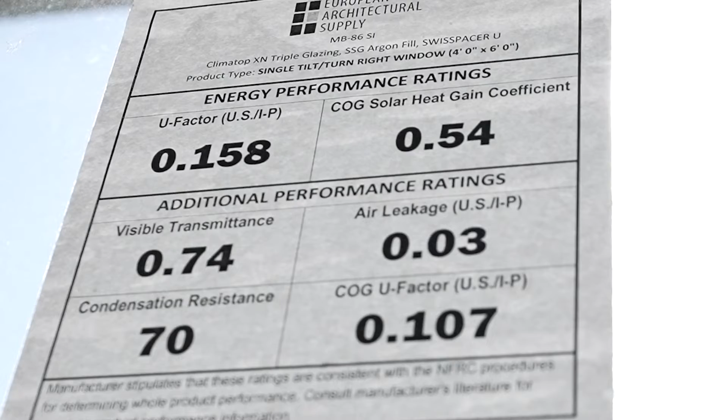So we'll start with the window I just talked about, this tilt turn. All these windows have a label, and the label tells us a number of things. We have COG U factor, which is center of glass, 0.107. So what that's telling me is that somewhere in the center of the glass, we're basically at R10, if you understand R values. The way you get there is you take 1 and divide it by the 0.107, and that gets you to that R10. It's basically the reciprocal of the U value.

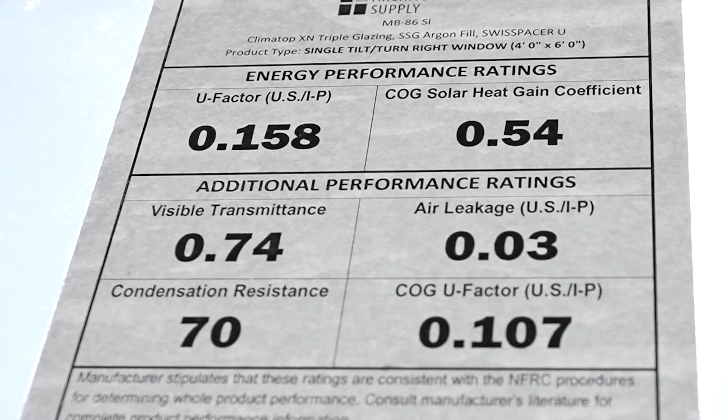The U factor of the window in its whole, with the frame and the glass, is at 0.158. You can see that's significantly less. If I take the reciprocal of that, 0.158 gets me to probably about R6.3. So it's significantly lower than the center of glass number.

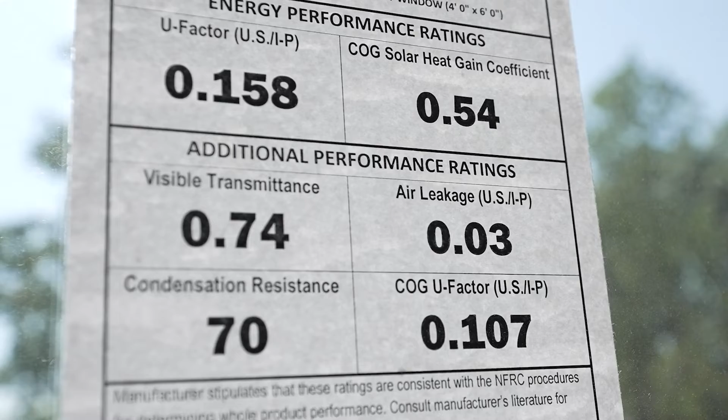So what generates that delta? Well, the center of glass is basically just measuring the R value of the center of the glass of the IGU, which is insulating glazing unit. The other number, 0.158, takes into account the frames—in this case the sash, or the frame of the operable piece, but also the frame that makes up the window frame that receives the sash. So we have a lot of aluminum there, and even though it's thermally broken, it's not as good an insulator as the center of the glass. We mix that with the frame, which is much poorer, and we get the window U factor, 0.158 again, R6.3 for that window.

Now, this window is 4 feet wide, 6 foot tall, and generates those numbers. Now we're going to go over to this window, which is 10 foot wide, 6 foot tall—basically 2.5 times the size of that window. Now you would think, wow, this big old window has to be super energy inefficient.

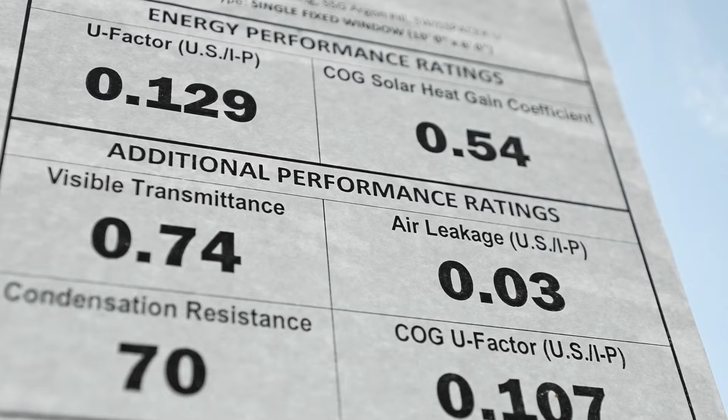Well, it's quite the contrary. Remember, as we just pointed out, the center of the glass is at R10. The frame on that other window was 6.3, but that was an operable frame, so we had twice the amount of basic material making up the frame. This is a fixed unit, so we have considerably less frame here. We have no air leakage in the system, and that generates a U factor for this window at 0.129, which translates to roughly R7.6. So we're a whole R1.5 above that first window, even though we're 2.5 sizes bigger, just because we moved from an operable window to a fixed window.

If we go to a third example, this is another tilt turn. The difference between this tilt turn and the first one is that one was 4 foot wide, 6 foot tall, which generated about 24 square feet of window. This one here is 3 foot wide by about 4.5 foot tall, so it's a little bit more than half of that window. But the majority of that half this one is shrunk is glass, and if you remember from the first example, glass had the higher R value than the frame.

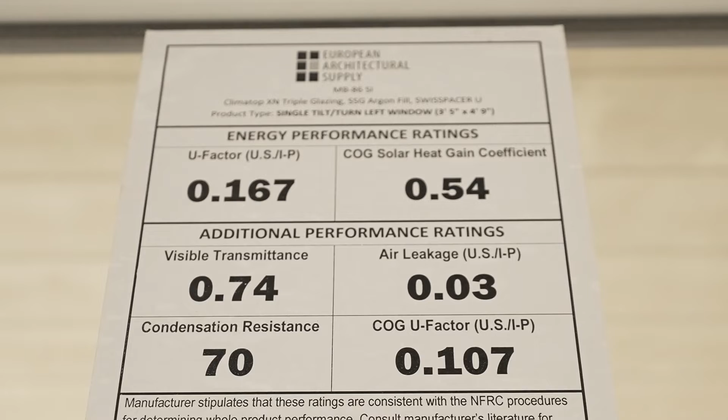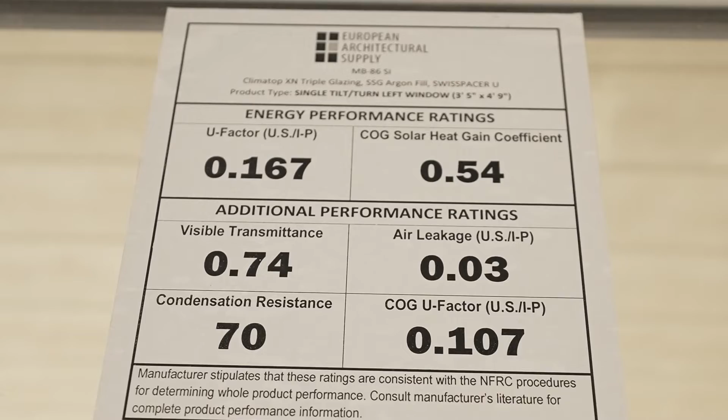So that first window, the glass ratio to frame is much higher than the glass ratio to frame here. Because this is less, we're at 0.167 here, even though we're still carrying the 0.107 for center of glass. What that does is take that number down to about R6. So it's only 0.3, 0.4 less than the other window—not a huge detriment to the decision.

And obviously this one had to be a different size because it's fitting over cabinets. The countertop's going into the window there, so we don't have any trim. So there's a bunch of design decisions that go beyond just performance. But I think it's really important that when you're designing a building, you understand what drives optimal performance versus where you end up losing performance.

Because I'm guessing if I took that window and made it half that size, 2 foot wide by say 2.5 feet tall, that 0.167 would probably go to like 0.183, and it would drop that number closer to R5.

So still not a bad window. To put it in perspective, a lot of domestic windows, the code requires about 0.3 for the U value, which translates into R3. So we're twice code here, twice code there, and 2+ code on the big 10-foot window. The other parting notion is regardless of how big or small the windows are, they're never as good as an insulated wall. The windows are always the worst part of the wall.

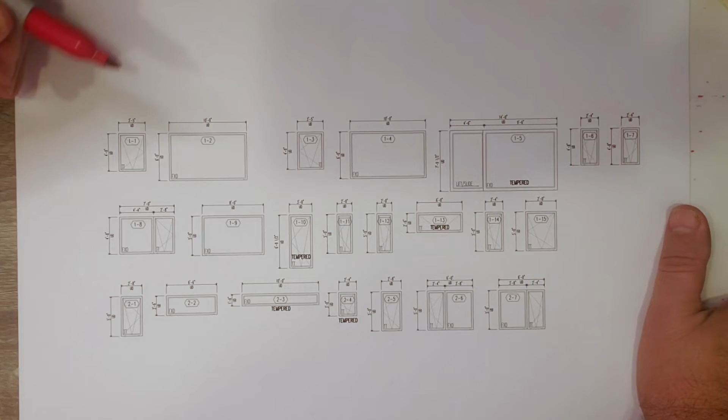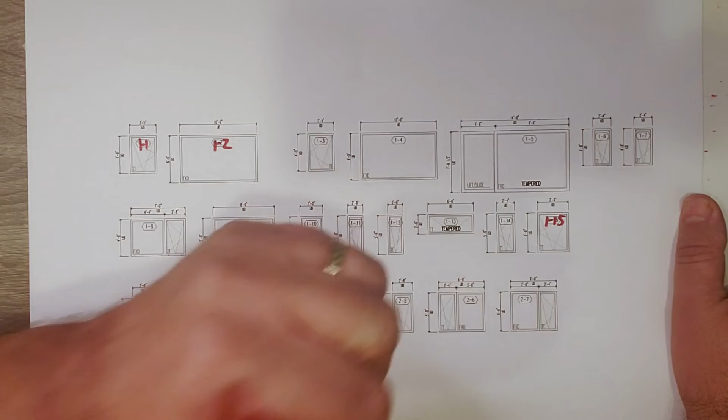So printed out here, these are the window elevations. They're drawn out and broken out of the set of drawings and out of the building elevations because this is the information that the window supplier uses to quote the window package. We talked about 3 different windows there: the first one was window 1-15, and you notice each window has an individual tag. We talked about 1-15, 1-1, and 1-2, and you see 3, 4, 5, 6. The second floor, they start out at 1. We had 15 windows on the first floor, 2-1, 2-2, 2-3, etc., up through 2-7, so 7 windows on the second floor.

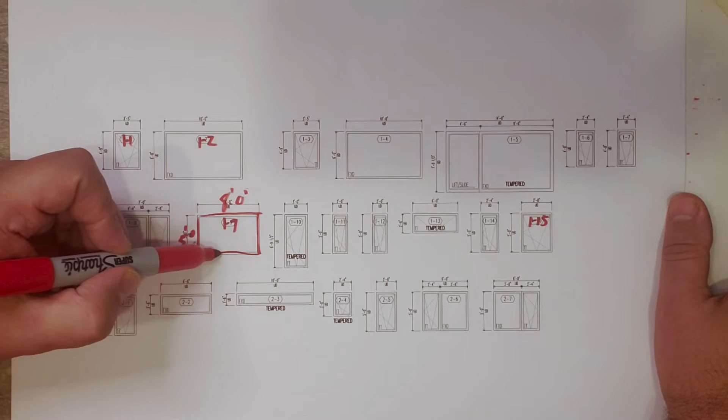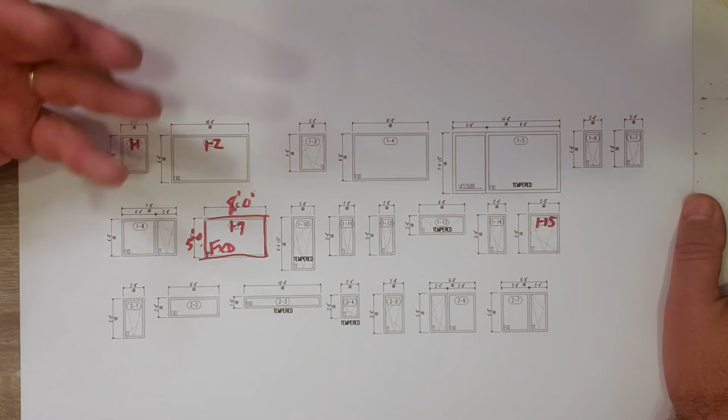A couple tidbits of information we put on here: we have the window tag, and we'll use window 1-9 as the example. You can see that is an 8-foot window - 8 foot by 5 foot, so 40 square foot window. We also label it as fixed, so they know they're quoting a fixed window. We know window 19 is 8 foot by 5 foot and is a fixed window. We also have other information universal to the whole package - they're Aluprof, they're aluminum, the color is anthracite gray, etc. But to the windows specifically, that's that information.

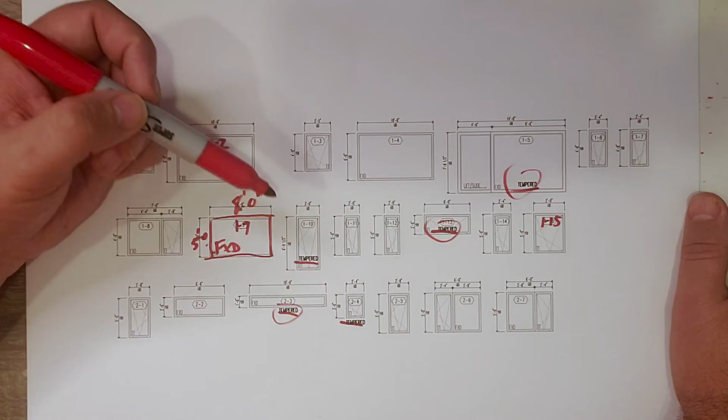You can see some of these windows are labeled as tempered, and they have to be tempered for different reasons, like it's a lift and slide door, or it's in a shower, or in a stairway, or some other hazardous location, bathroom, or it's too close to the floor. There's a number of reasons why windows get tempered, and that does add a little bit to the cost of the window.

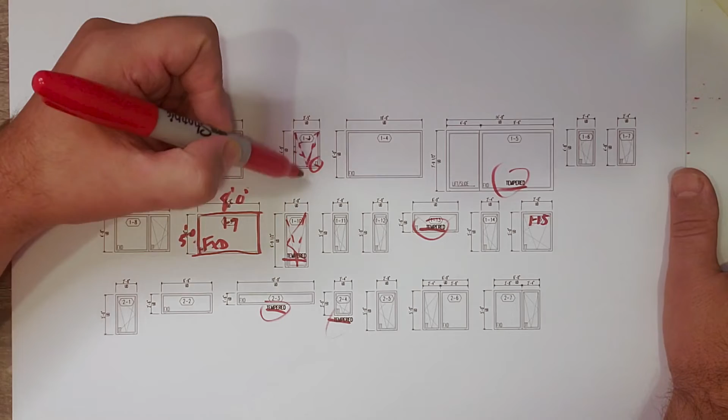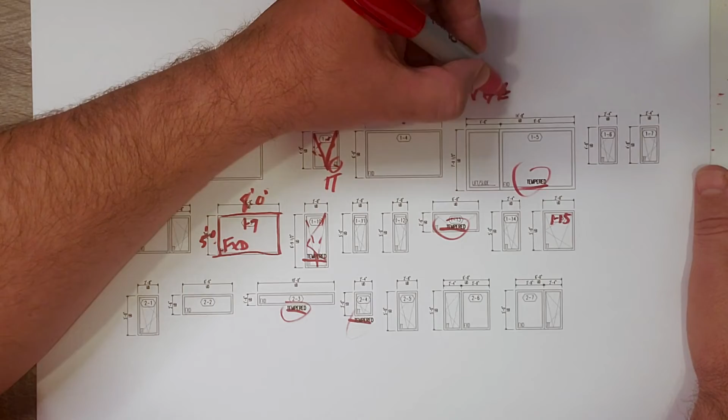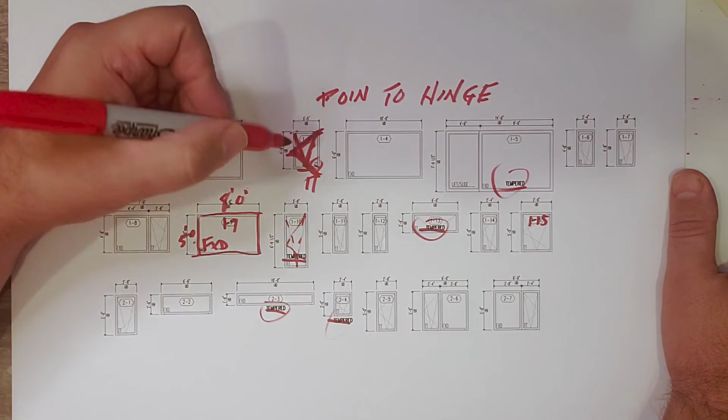You can see on some of these they have some funky arrows or dashed lines moving through them. Those are tilt turn windows, labeled TT, and what it's saying is these are the direction of operation. We have the one that goes down - the way I was always taught to remember is the arrows point to the hinge. That is the American standard. When this points down, that's the tilt version - the hinge is here, and this is the strike end, so the window falls in like a hopper. When it has the arrows going side to side, that's the turn option, with the hinge being here and the strike being on that side. These windows are always viewed from the exterior.

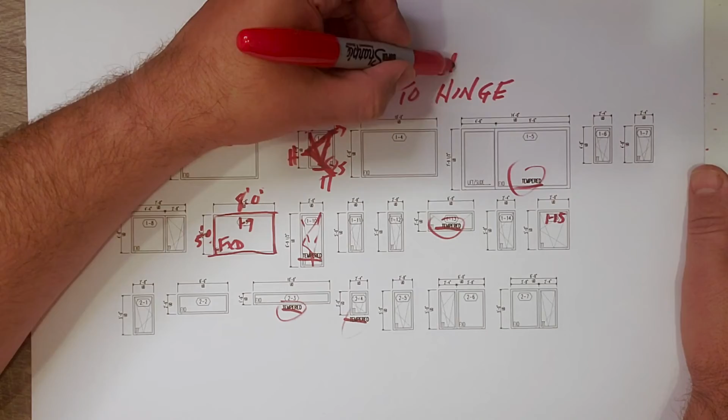So that window is swinging inward, and it's hinged on the left side, looking at it from the exterior.

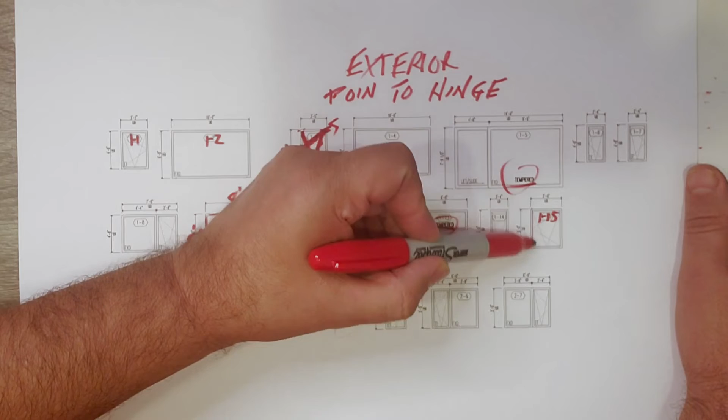Let's dive into the three windows we talked about specifically and reiterate those. So window 115, that's a 4 foot by 6 foot window. That one had a center of glass value of 0.107, and it had a U value of 0.158.

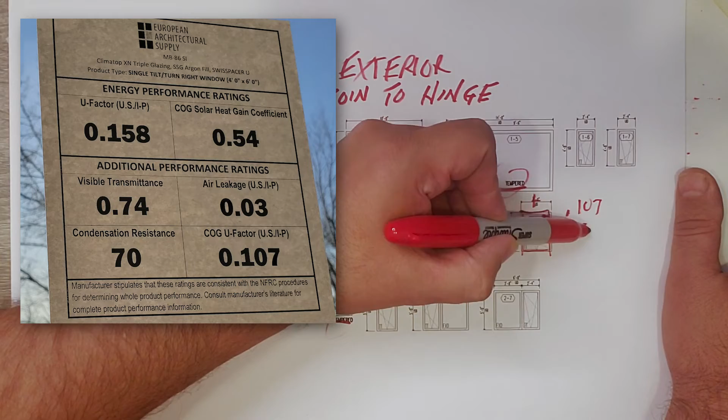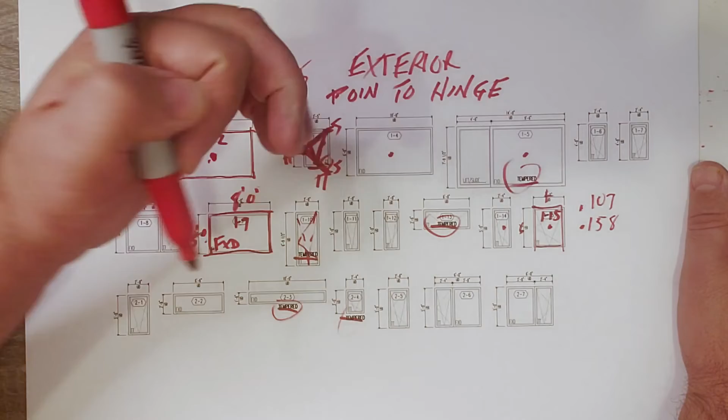Now, interestingly enough, when we go over to this window that is 10 foot by 6, which is 2.5 times window 115, it still has the 0.107 center of glass, because the glass technology is the same. So the U value at the center of glass is always going to be the same because the glass is made the same way. That doesn't change.

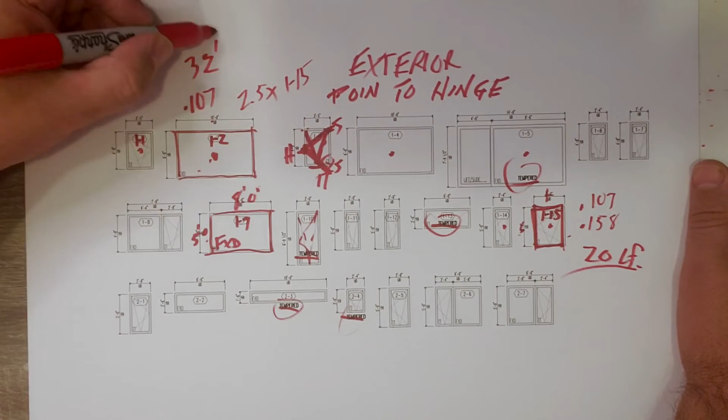But what does change is this: at 4 foot by 6 foot, that's 12 and 8, so that's 20 linear feet of frame. This is 32 linear feet of frame. But that 32 is not 2.5 times or 50 linear feet, which is what that window would be if it scaled proportionally.

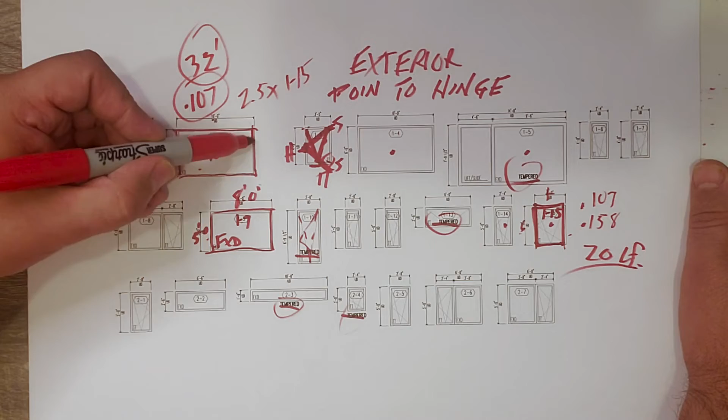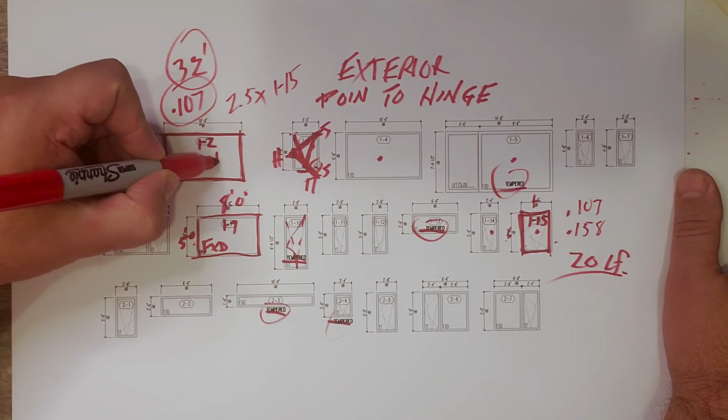So the efficiency comes from the fact that they both have the same center of glass, but because this does increase in size, but not proportionally to the size of the window, meaning we do have more frame, but it's not 2.5 times the frame, this window here yields 0.129. And proportionally, the last window we looked at was 1.1 by 1.1, again with a center of glass of 0.107.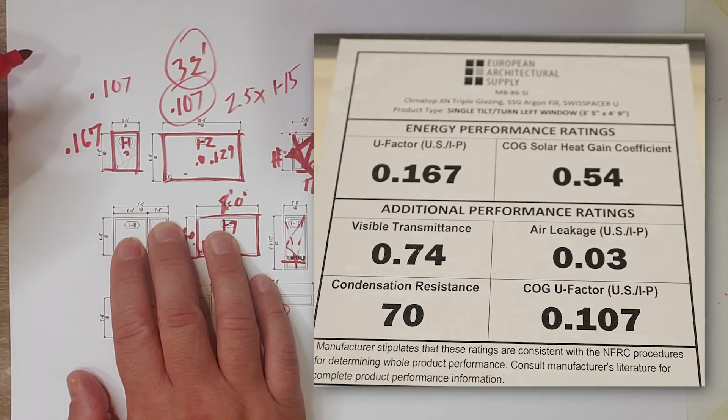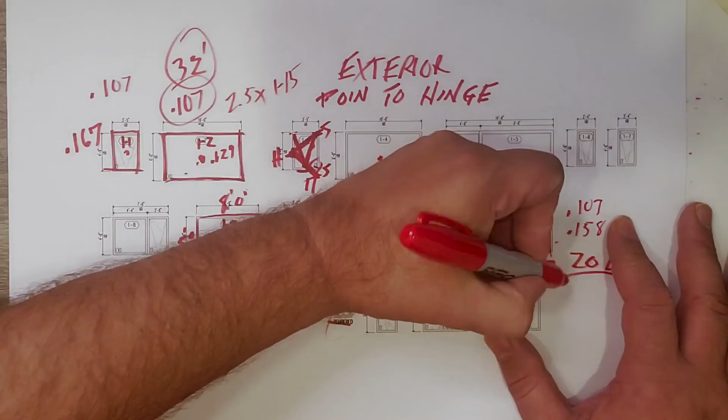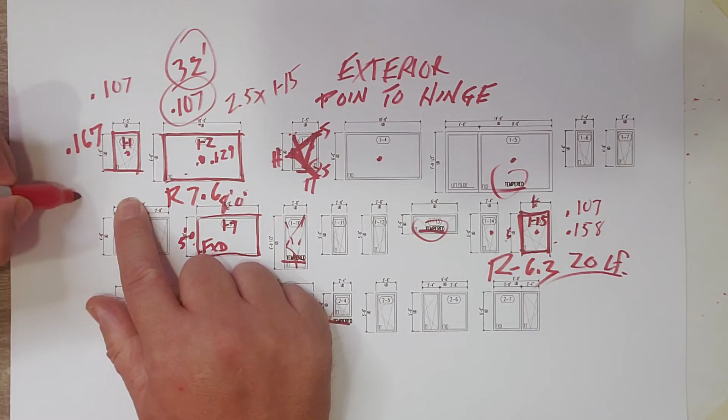But it had a U value of 0.167. Now I'm speaking in U values. If you want to translate that to R value, you simply divide 1 by the U value number. So the 0.158 window is R6.3. The larger window here is R7.6, and the last window here is right around R6.

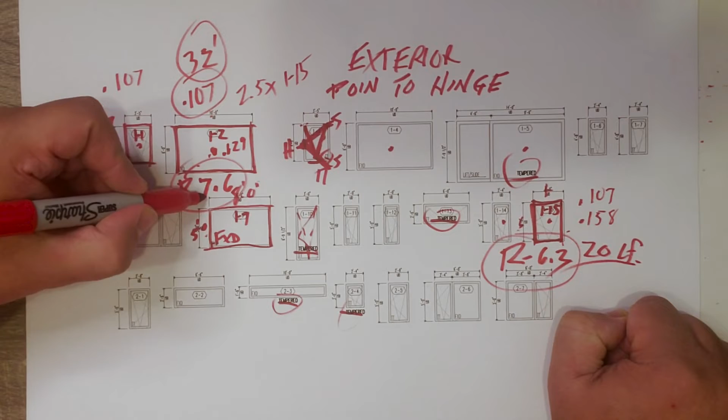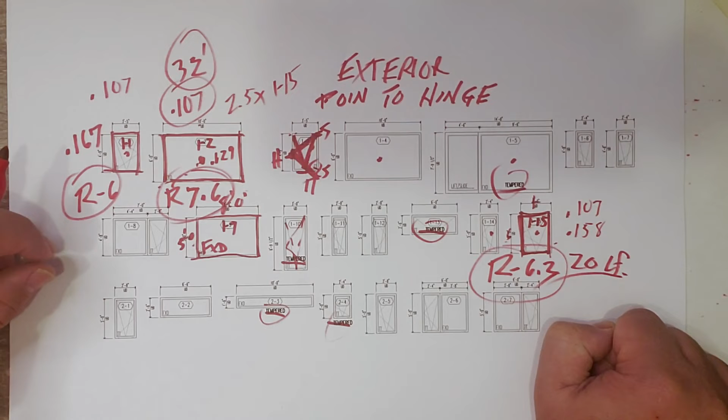So you can see that the larger window here, even though it's more glass, it's more efficient because the center of glass number remains constant, but the frames change the overall U value of the window, meaning that the larger I make the window, the less frame I have, the more efficient it becomes.

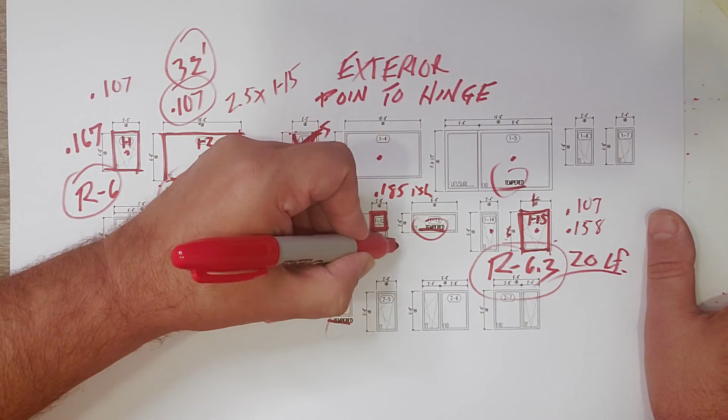If I took one of these smaller windows and made it 2 foot wide by 2 foot tall, that would probably be even closer to like 0.185-ish, which would yield R5.5, something in that range. Because we have a lot of frame with an itty bitty piece of glass.

So those little windows, they look nice, they have their place, but when you're dealing with European windows, you really want to be operating in this kind of arena for efficiency and for cost.

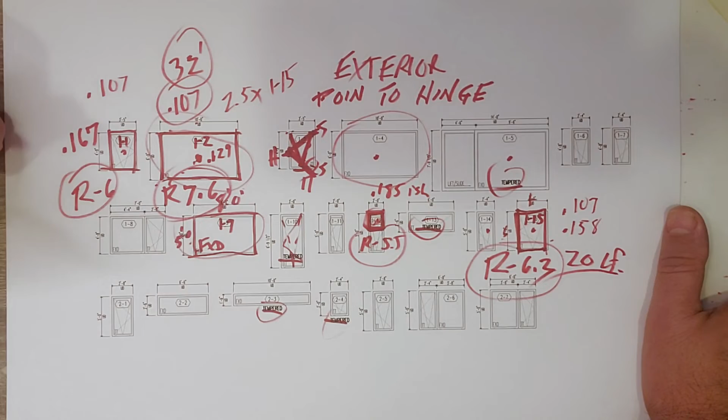I'm not going to reveal the exact cost of these windows, but certainly the difference between, say, a fixed and a tilt turn is the tilt turn has a sash and a frame. The sash has to move, so there's associated hardware. There's hardware with it tilting. There's hardware with it turning, all of that.

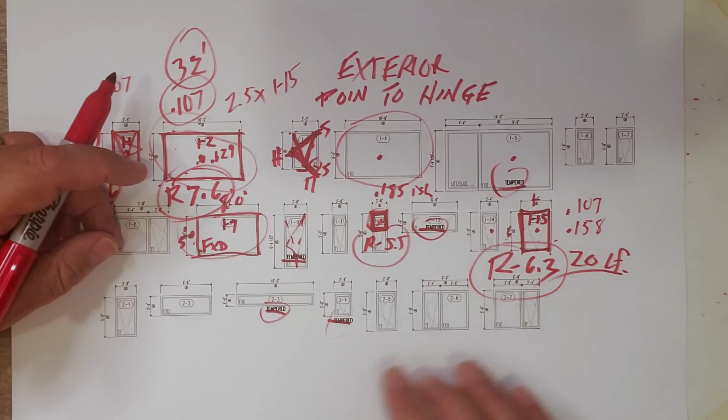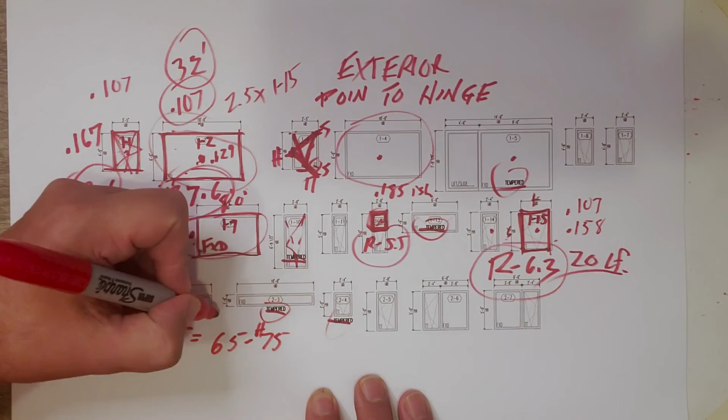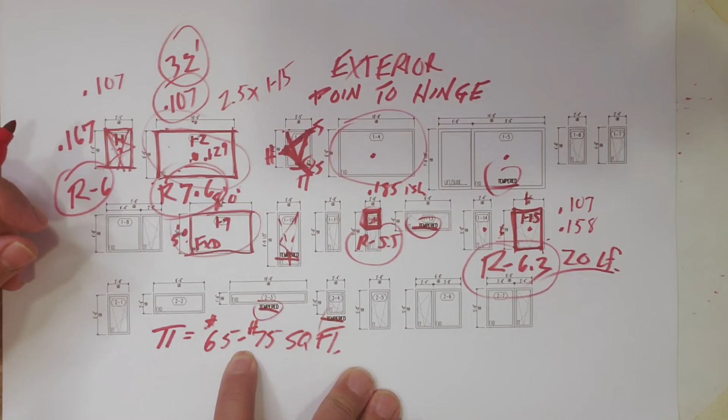So your typical tilt turn window from European windows, you're probably in a $65 to $75 range, and that's per square foot for the window. So you do 4 times 6, that's 24. 24 times 65-ish, that's going to put you in maybe like a $1,400 range or something like that.

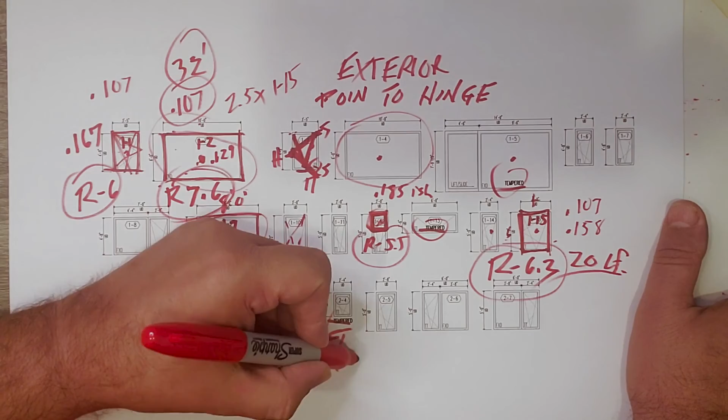Now, fixed windows, those are somewhere down in a $35 to $60 range per square foot. And the reason that's wider is sometimes when you get bigger, they have to move into tempered style windows, and there's some other governing factors that drive that.

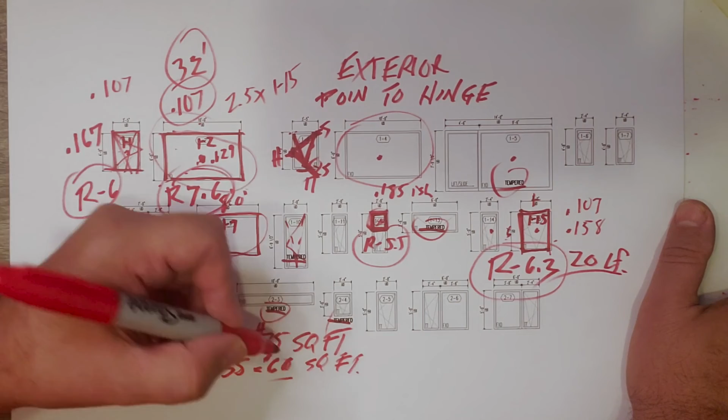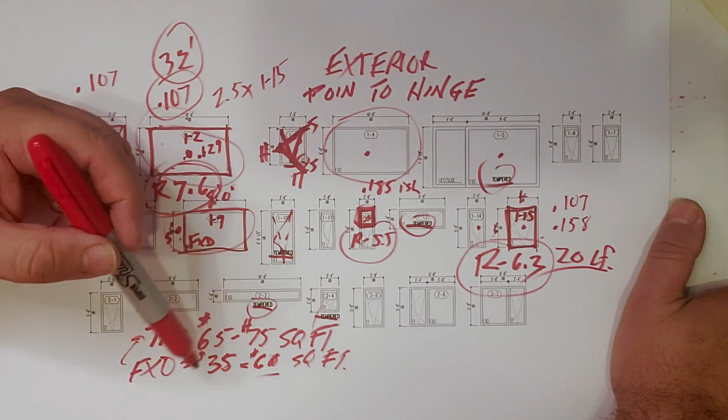But typically the fixed windows are less expensive than the tilt turn windows, just because the tilt turn has all that added hardware. There's no hardware in a fixed window. It's a big piece of glass in a big frame that gets inserted in a big hole in the wall, and then it's forgotten about. So you get those numbers.

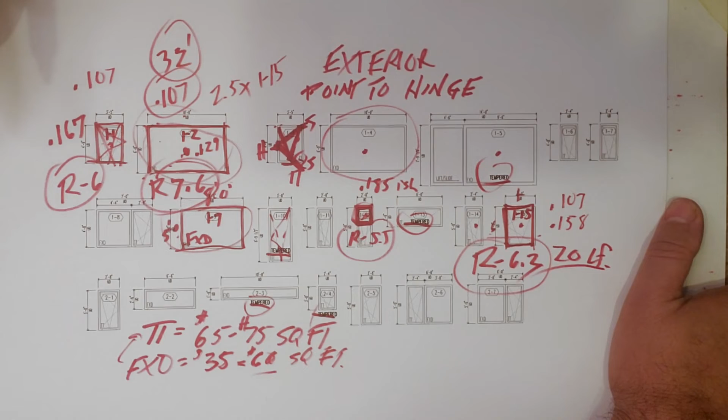So hopefully this is a little bit of help to demystify some of the thoughts about window performance and how it relates to cost, size, operation, what a window schedule looks like, all that good stuff. So anyways, that's all I got on window performance.

All right. Big Red goes to bed. And guess what? It's the last day of the year. So that's the last time you see Big Red in 2021. Next time you see him, he's breaking down doors in 2022. And I can tell you right now, from the outlook of things, Big Red is going to have a very busy year ahead.